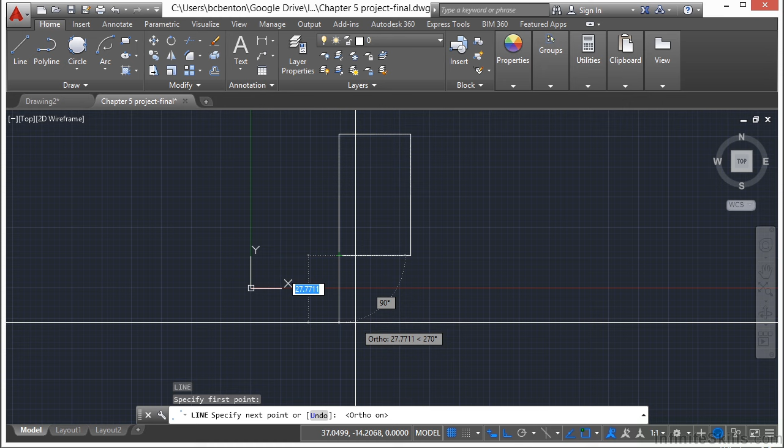Draw a straight line down. Type in 30 for 30 units. And we'll just draw a line out arbitrarily 200 units. Press return. Press return again. I'm going to throw in a command here that we haven't used yet, and that's called the move command. Type in M for move. Press enter, select this line, press enter again.

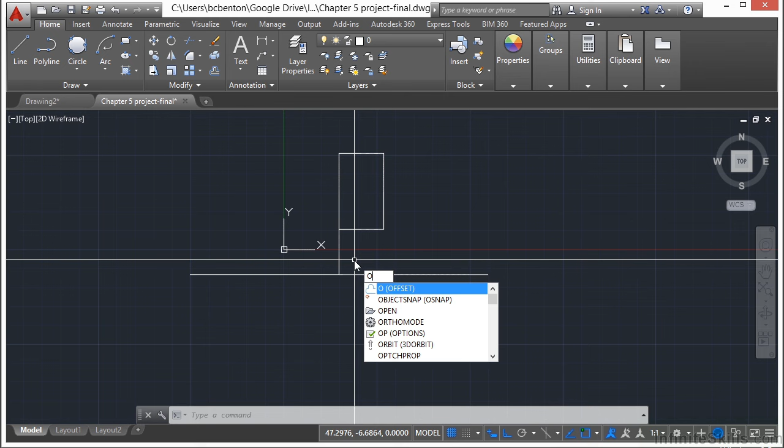With your running osnaps on for the midpoint, find that little triangle and left click there. Now move over to the left, use the endpoint osnap and click on there. I'm going to throw in another command we haven't used yet called the offset command. And I'm doing this because it's just so much easier to use the right commands. We'll go into details on these much later on.

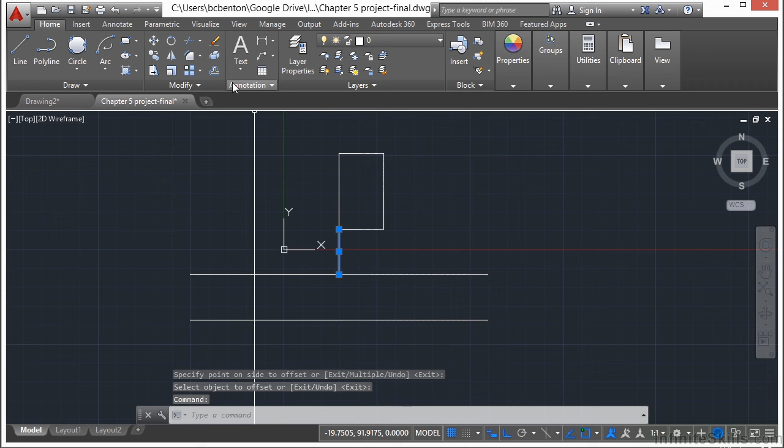So type in O for offset, press enter or the return key, type in 30 for 30 units, press return again, select this line, move your mouse down below it, left click and press enter. So now we have a house and our road. Select this line and erase it. I'm going to move these just kind of out of the way so that our UCS icon is not in our way.

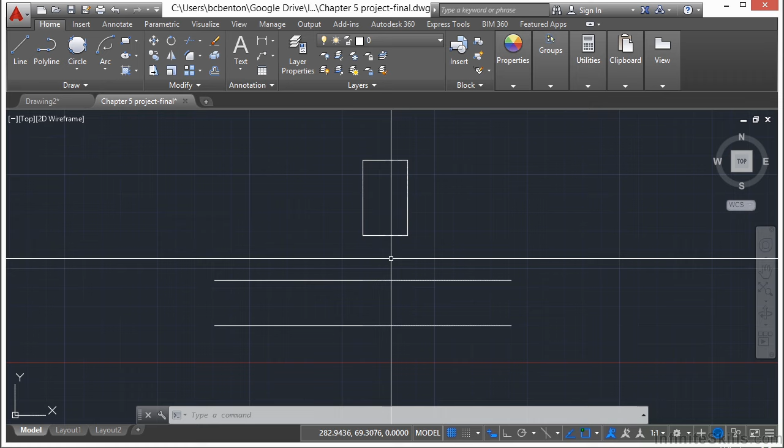There. Okay, so now we have our house and our road, so we kind of have an idea of what's going on. This is the front of the house, this is the rear, and then our sides. Now we need to draw a driveway. We're going to make two parallel lines, about 20 units apart from the house to the road. Type L for line, and then type in NEA for near osnap. Press enter, kind of zoom in, and just find anywhere on here, it doesn't really matter. Left click, and then draw a line down here.

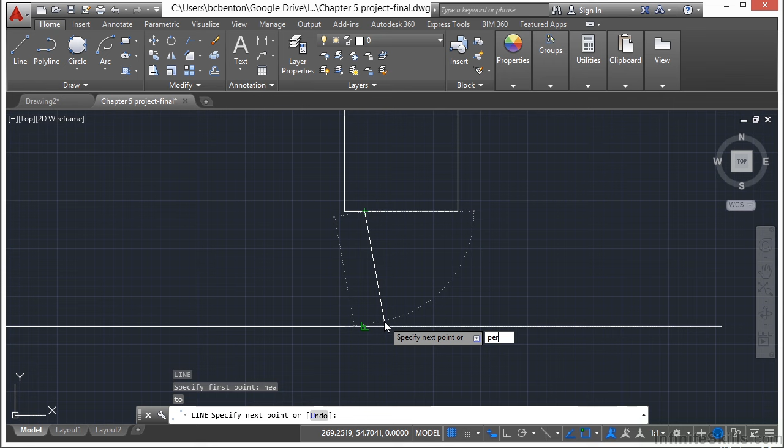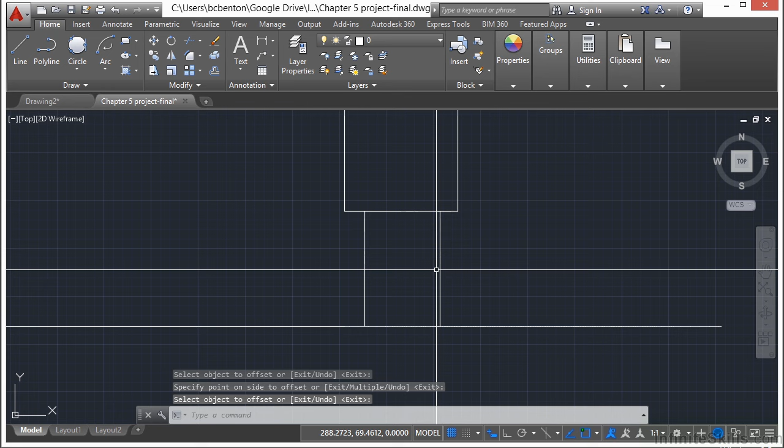Use the perpendicular osnap. You can type in PER to override that. Press enter. And now that line is drawn. Now I want to make this 20 feet wide, so I'm going to use that offset command again. Type in the letter O, press enter, and type in 20, and select the line, and then move to the right of it, and then click again, and then enter. Now we have another line that's 20 units wide. This is our driveway. It's a very skinny house, but you get the idea.

Now I want to make a doorway. Let's put the door on the side over here, so it's a side door. Start the line command, press return, and again type in NEA for near, press return, and zoom in. Just anywhere down here is fine. Now I'm going to draw a line. Because it's a door, I'm going to make it 3 units long, type in 3, and then press tab. Now this tells AutoCAD that I'm drawing at an angle. So I'm going to draw it at 60 degrees.

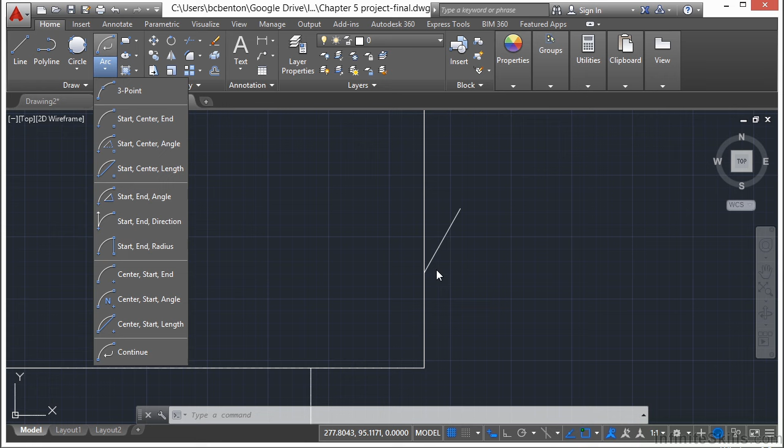Press return, return again. So now I have a line that's going to be a door. Now, oftentimes in architectural drawings, when there's a door and it's shown open, you put a little arc in there. So let's go with our arc. What do we know? I have my start point, which is going to start here. It's going to end over here somewhere. I don't know exactly where, but I do know that angle is 30 degrees. And I know this is going to be my center point.

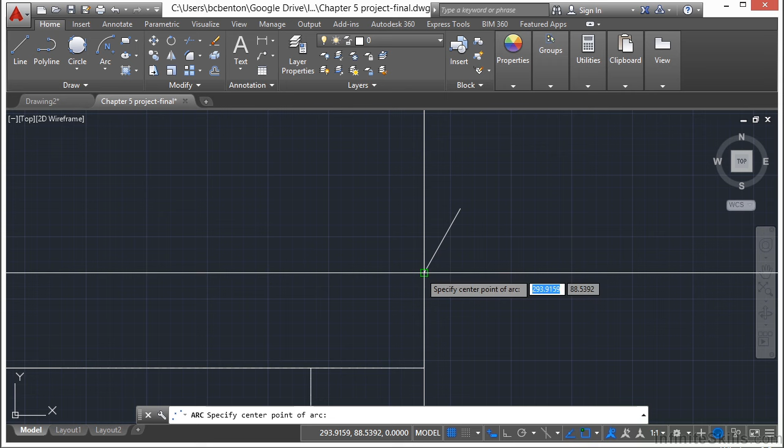So I can go with the center, an end, and an angle. So I select that object. There's my center point. There's my start point. And now my angle, type in 30 for 30 degrees. And there we go. So there's my little door.

Now I've done some work already, and I don't want to lose this, so I'm going to save it. So I click the Save button, or I press Control and S at the same time. So now I've saved my work. I'm not going to lose any of it.

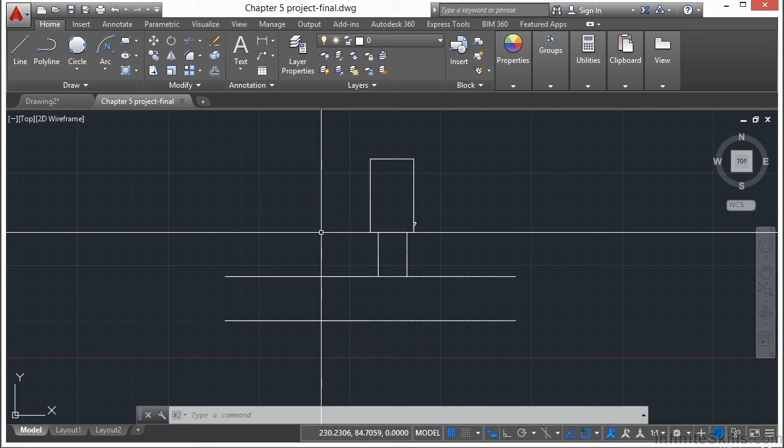Now I want to draw a sidewalk. So I'm going to draw a polyline, and I'm going to make it parallel, about 3 units apart. So let's start our polyline command, and it's going to come from this door. I'm going to left click here, and I want it to come out straight a little bit, and then it's going to curve around into my driveway. So let's turn on my ortho command, and let's just draw it out a few units. It doesn't really matter how far.

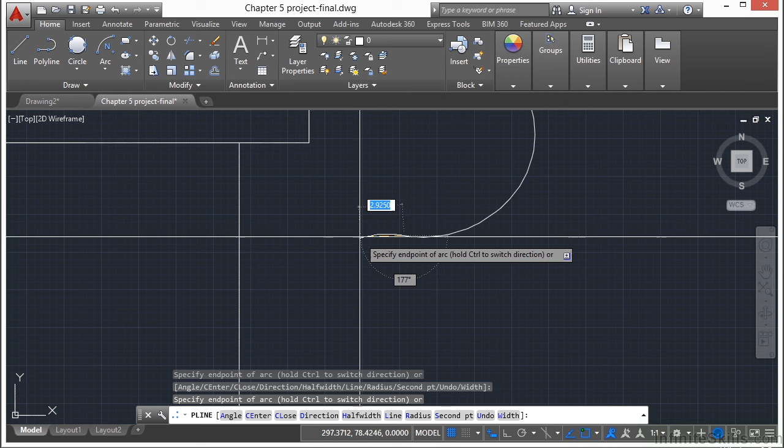I'm going to turn off my ortho command now, and I'm going to start drawing arcs. So type in the letter A for arc, press enter, and I'm going to make a slightly meandering little sidewalk here with some slight arcs to it, but then it levels off to a straight line, and I'm going to make this perpendicular to my sidewalk.

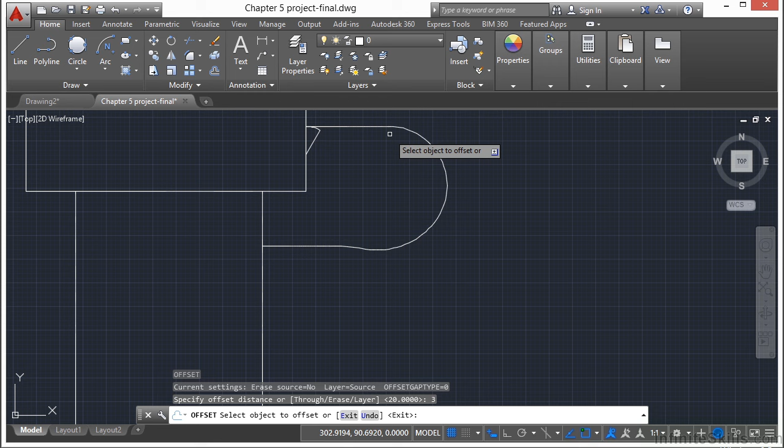Press return. So there's the start of my sidewalk, and I'm going to offset this again. So type in the letter O, this time type in 3, press return, select the line, go to the inside, and left click, and then press enter. So there's a nice little sidewalk.

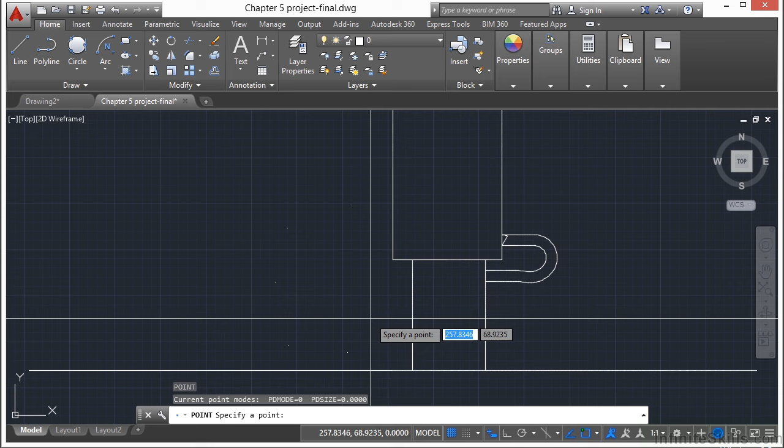Now I need to create a planting area. And what I'm going to do is connect the dots. So I'm going to make some points. Type in PO and then enter. And that planting area is going to be over here somewhere. Now remember, if you right click, it acts as the enter command, which will give you your last command that you had run. Now those are there, and I'm going to type in DDPTYPE.

And let's set these up a little bit. Let's make the point size relative to the screen. Keep it at 5%. Let's make little X marks. Click OK, and there they go.

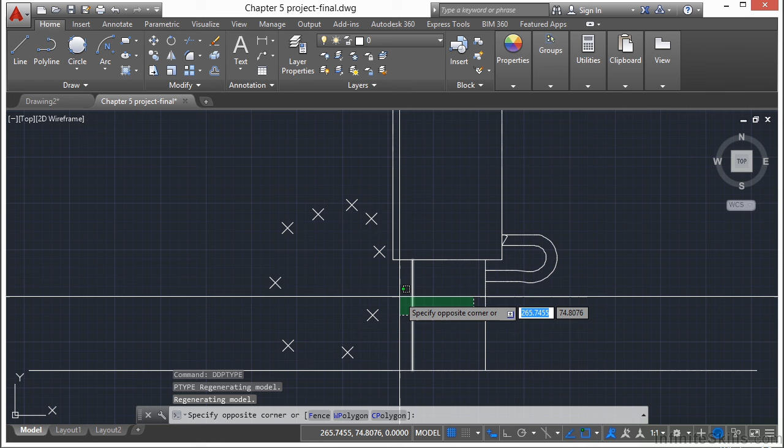Now I'm going to use my polyline command. I'm going to connect the dots. So just with your running O-snaps on, you can see this becomes very easy. Make sure you use the node O-snap. Then when I'm done, I can just type in CL to close it.

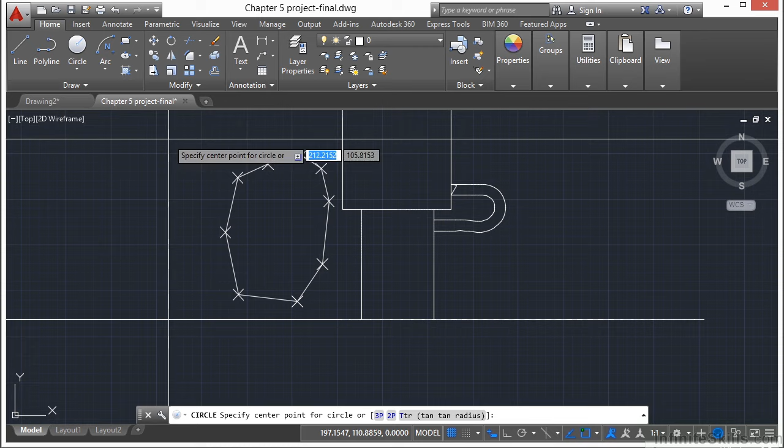Now let's draw some circles just randomly in here. And I just need a center and a radius. Varying sizes, varying amounts. Maybe these will represent what some plants are going to be.

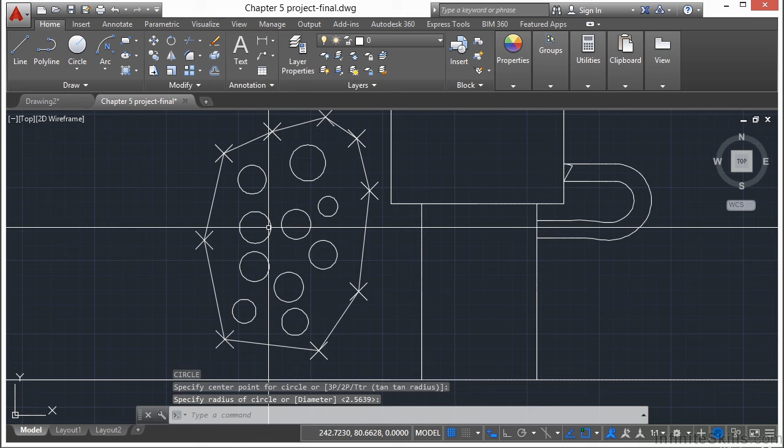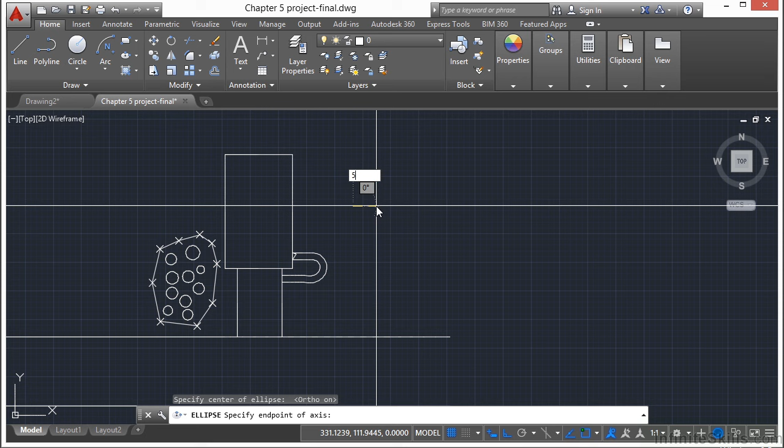Now over here on the side, I'm going to draw a nice little ellipse for a little pool or fountain type area. So let's go to our regular center ellipse. I'm going to turn on my ortho again. Just press F8 or click on the icon down here in the bottom. Select a point, and I'm going to make it 5 units wide and then 10 units tall.

And now I want to make a pathway or some stones around it just to pretty up the fountain. So I'm going to use my polygon command. Come up here for polygon, and I'm going to give it 6 sides. I'm going to pick a point here, inscribe it, and I'm going to make them about 1 unit in size, so they're about 2 or so units wide.

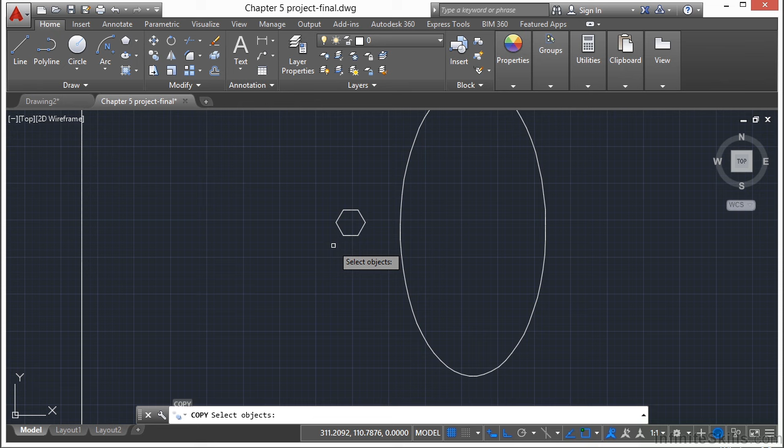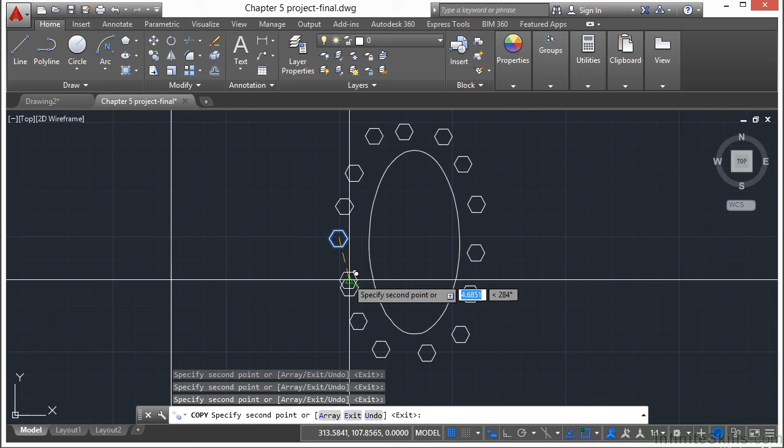Now I'm going to copy these with the copy command. So type in CP, press enter, select that, press enter again. Just pick a point somewhere towards the middle, turn off my ortho, and I'm just going to randomly put them around my pool. You just left click at the spot where you want it to go. When you're finished, press return, double click on your mouse, and we have the start of a landscaping plan for our house.

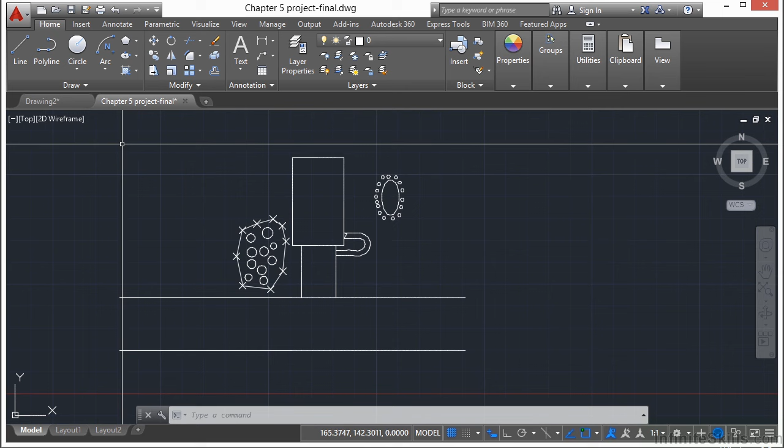Make sure to save your work so that you don't lose it. And there you go. Now yours might be a little bit different because I did some things that were just kind of random, and that's perfectly fine. This is just a demonstration very quickly of how to draw with several different tools in a very simple way.